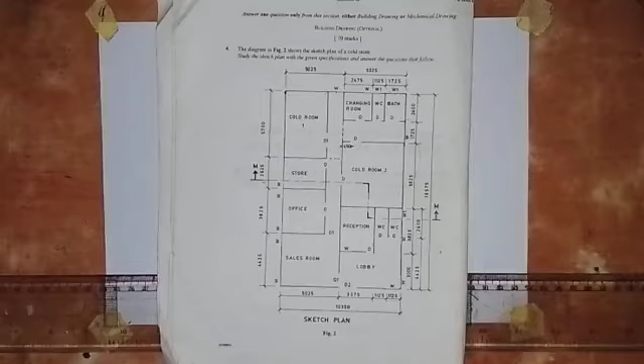Welcome back to my channel. Here we are going to be working on the construction of the sectional view of this building, as we have worked on the floor plan and we have also worked on the front elevation, and then we also worked on the right end elevation. So right now we'll be working on the construction of the sectional view, as we are told in the questions that we should draw to a scale of 1:50 the detailed section on plane MM.

Okay, so we need to look at the cutting plane, how it goes on the sketch plan. So this is the cutting plane, it goes in this direction like this, and it comes out here. The arrowheads, as we have, so it goes in this direction and this also goes in this direction. So we are cutting this part off and want to see what we have on the surface like this.

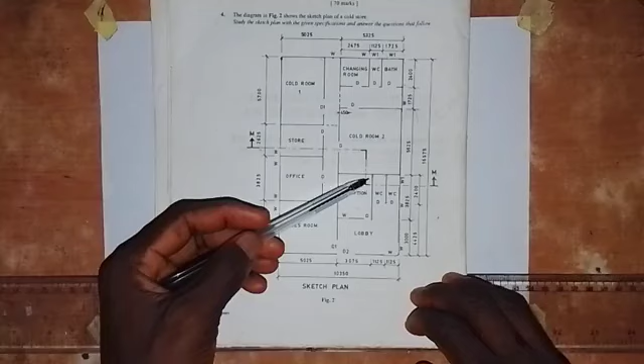Let's look at the walls that the cutting plane cut within the building. So it cut this wall, it cut this wall, it cut this wall here, and then it cut this wall, and this wall. So we have 6 walls: 1, 2, 3, 4, 5, 6. And then it also cut this wall, but for this one we'll tell you how we are going to show this in the drawing.

And then within this wall, it cut this window, it cut this door here, and then it cut this window here. So those are the components that we are going to put in the drawing. And then we are going to see this beam, probably we see this window, okay, and then we see this door. So those are things that we are going to put in this drawing.

All right, so the next thing that we are going to do now is to begin the drawing. We are going to start by drawing a horizontal line here. This horizontal line represents the ground line, so we are going to write GL here.

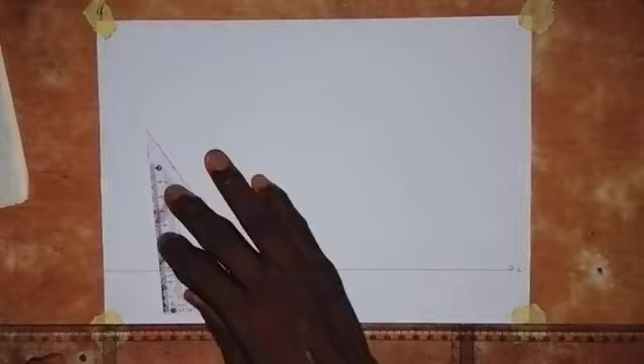So for the ground line, this is the first line that we are to draw. So we have this now. All right, so then we are going to start by positioning the external part of this wall here on this side. I'm going to draw a vertical line here, leaving a little space on this side, then I will draw a short vertical like this first.

Okay, so now let's look at the dimensions that we have to take. Let's take the total length from here to here first. So total length from here to here is 10,350. So 10,350 by 50 - what would that give us? I have to do that simple calculation.

10,350 - what is it going to give us if we divide it by 50, as we are given a scale of 1:50? So 10,350 by 50. That gives us 207. That is what it gives us. So we are going to take a measurement of 207 first.

So I'm using this ruler. From here, I have this to be 150, and then I have to add 57 to this to make it 207. So this is 57, we have this to be 57. All right, so then that is the total - that is going to be the last point that I put here, for this particular wall that we have here.

So I'm going to draw a vertical line at this point, just like I did for this. So this will be the external part of this wall on this side. All right, so then the next thing that we are going to do is to position other walls.

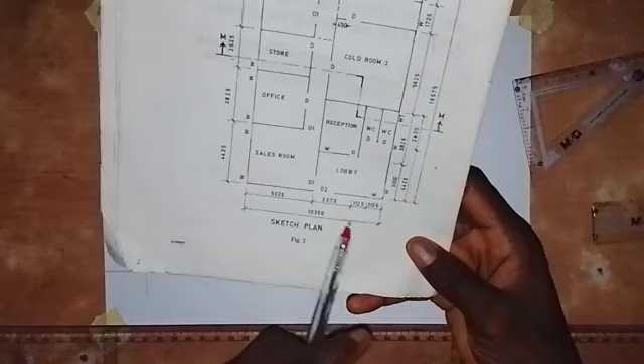So for other walls, let's start from here to here. So here we have the distance from here to here to be 1,125. Okay, if we divide 1,125 by 50, that gives us 22.5, approximately 23 millimeters. So I'll be taking it as 23 millimeters. I'll take a measurement of 23 millimeters - so this is 23 millimeters here. So I have this point.

Then we have 2 of them. So we also have for this one, from here to here is also 1125. So I'll take another 23 from this point to this side. Okay, so we have this now.

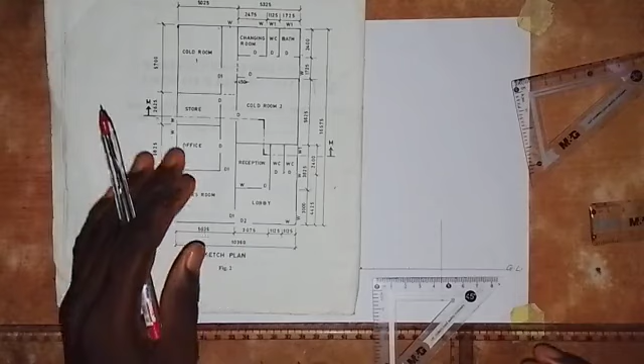All right, so then the next wall that we have here, we have to position, and then we have the distance from here to here to be 3075. So if I divide 3075 by 50, that gives me 61.5. So I'll take it as 61 millimeters.

So 61 millimeters, so we have this now. We position this wall that we have here at this point. Then we also need to position this particular wall, so I'll come to this end here. So for this particular wall, the total distance from here to this one is...

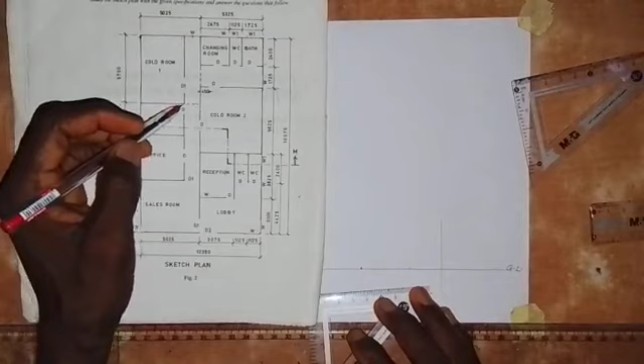5,025. But what I did in the floor plan, I used 1,500 for this distance from here to here. So if we divide that 1,500 by 50, that is going to be 30 millimeters. So I need to take a measurement of 30 millimeters from here. So this is 30 millimeters here.

So for this measurement that we have taken, they are all for the walls that we have within the building. We are going to draw a vertical line at this point here, take it down a bit, and then we also have a vertical line here. So we draw a vertical line here like this. Then coming to this point here, we also draw a vertical line, and coming here, we also draw a vertical line. So we have positioned all the walls, and these lines represent the external part of the walls. Now let's work on the thickness of the walls.

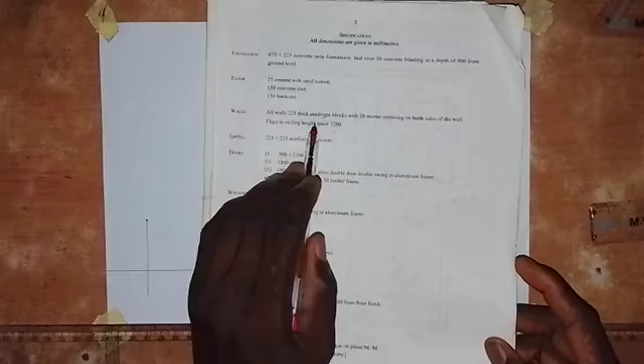So we are going to take a measurement of 5 millimeters from this. So this is an external wall, so we have to take that 5 millimeters inward. So this is 5 millimeters here. And then for this one, I will take this one to this side because we have more space on this side, so 5 millimeters to this side here. And then for this, we have more space on this side, so I will take it in here as 5 millimeters. So this is 5 millimeters here.

Then for this, I will also take it in here, so this is 5 millimeters. Then for this one, I will take it to this side, 5 millimeters here. So I have this. And then for this, I will take it inside because this is an external wall, so I have this as 5 millimeters.

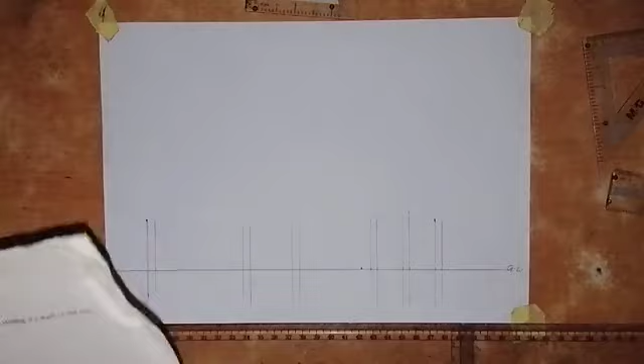So now we go for the construction of the foundation, footing and other things. Let's start. So this is the details of the foundation in the specification. Here we have that 675 by 225 concrete strip foundation laid over 50 concrete blinding at a depth of 900 from the ground level.

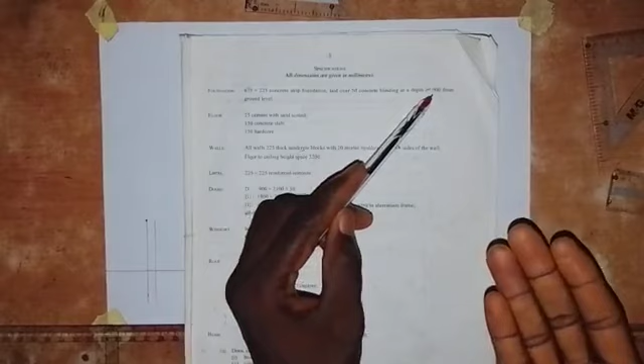So we start with the depth because the bottom of the blinding is at a distance of 900 from the ground level, so we started with the ground level. This 900 we are going to divide by 50, and that will give us 18 millimeters. So we take a measurement of 18 millimeters down the ground level, or ground line. So this is 18 millimeters. So we are going to draw a horizontal line, that's 18 millimeters. So from here we draw a horizontal line across. So it goes like this.

All right, so then the next thing that we are going to do is that we are told that the thickness of the blinding is 50.

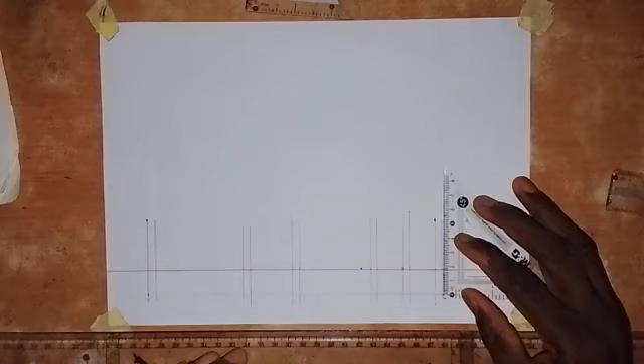The thickness is 50, so if we divide 50 by 50, that gives us 1 millimeter. But that 1 millimeter may not really show in our work, so I want us to make it something like 1.5 millimeters, so it's a little bit more feasible.

So to be a little bit feasible, we are going to draw a horizontal line. I've taken that measurement. Let me take it on this side so I'll use a ruler to join them together, and I'll also take it here on this side. Okay, so we have this.

So let me use something to join the points together. Okay, so if I join them, all right, so we have this now. This is going to represent the blinding.

So then the next thing we are going to do is work on the foundation footing itself. So we go this way.

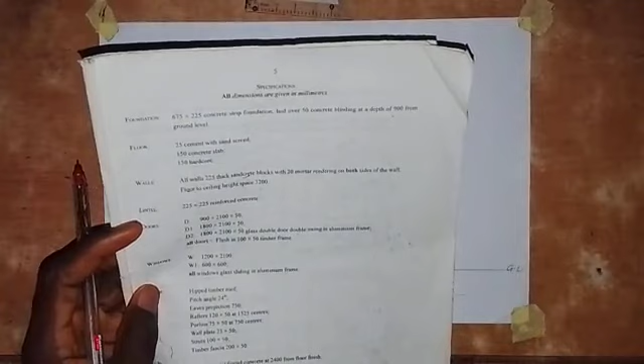So the width of the foundation footing is given as 225. If I divide 225 by 50, that's going to give us 4 point something - so 225 by 50, that is 4.5. So we take it as 5 millimeters.

So I will come up here and take a measurement of 5 millimeters above the second line that we drew for the blinding. This is 5 millimeters here. Then I will come to this end - I want us to use the ruler to join them. So this is 5 millimeters.

Let me just use the T-square to do the joining. So I can see the 2 points, I just need to draw a line like this to join them. So we have this now - that is for the width of the foundation footing.

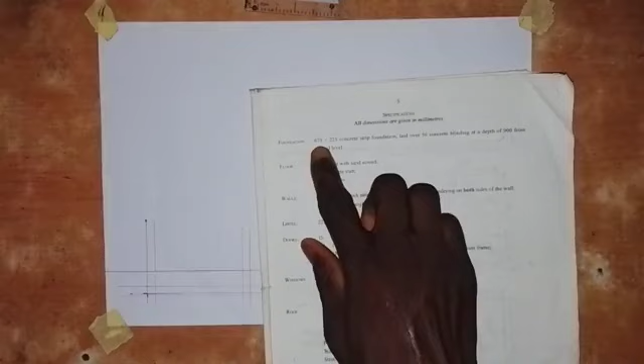The next thing we are going to do is work on the length of the foundation footing, which is 675. So 675 by 50 gives us 13.5. What I will do is make it 15 millimeters, because the thickness of the wall is 225, so I just make it 15.

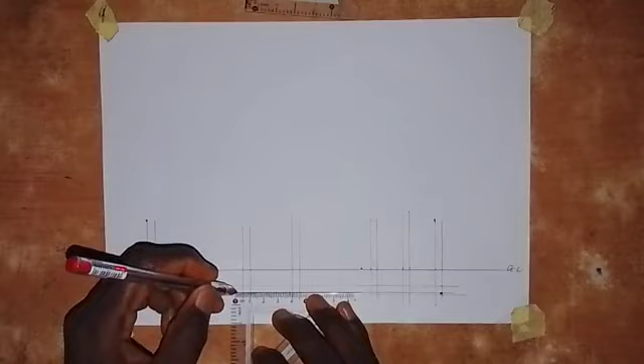So what I will do is come here and take a measurement of 5 millimeters to the left side, and 5 millimeters to the right side here. Then here also I will do the same thing, 5 millimeters to the left side. So I'm taking 5 millimeters to the left side and 5 to the right side here.

Then here also I'll do the same thing - 5 to the left side and 5 to the right side, and here also I will take 5 to the left side and 5 to the right side. So doing the same thing here: 5 millimeters to the left and 5 to the right side, so this is 5 millimeters and 5 millimeters. So we have this.

So the next thing I'm going to do now is make each of them a rectangle, by drawing this line from here to here, and then I will draw this line. Then here I will draw the line like this, and here I will draw this line. Then I'll do the same thing here. So we have this.

So the foundation footing and the blinding, that's what we are working on right now - they'll be in form of rectangles, as you can see me doing it here. So then I'm going to make this line a thick line like this, so that we can see it. And we also do the same thing by making this line a thick line here.

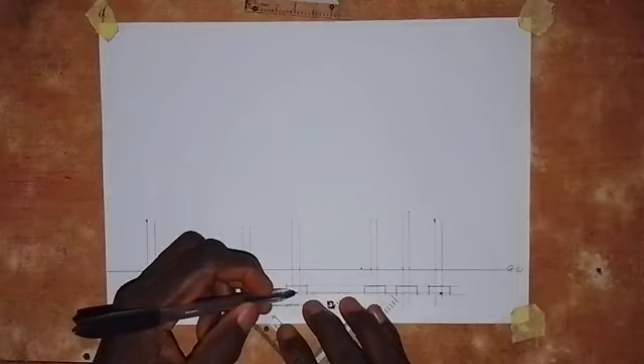Okay, so we have the foundation footing and the blinding. So what we are to do now, as we are told that the blinding is made of concrete, and the foundation footing is also made of concrete, we need to show that here.

So just draw something like this - put something like a triangle, and this will represent the gravel. We do the same thing for the blinding. I'm not going to do it for everything - I will come here also and do one, because you don't have to do it for everything. It's not compulsory to do it for everything, maybe just 2 or 3.

So this triangle I drew represents the gravel within the mixture. Let me do it for this one too. All right, so this is okay.

For the blinding, we just do the same thing as I did here. All right, so we are done with that.

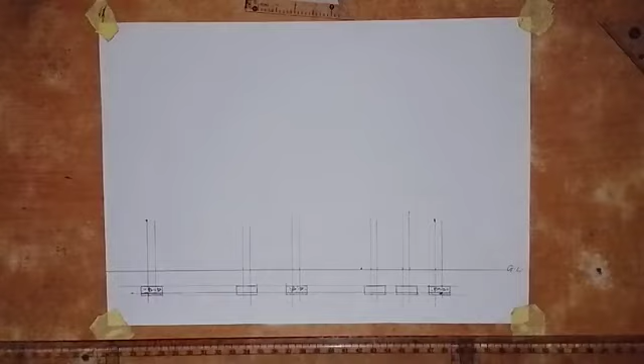The next thing we are going to do is the floor. So for the floor, we have the components: 25 cement with sand screed, then 150 concrete slab, and 150 hardcore. Each of these we are dividing by 50.

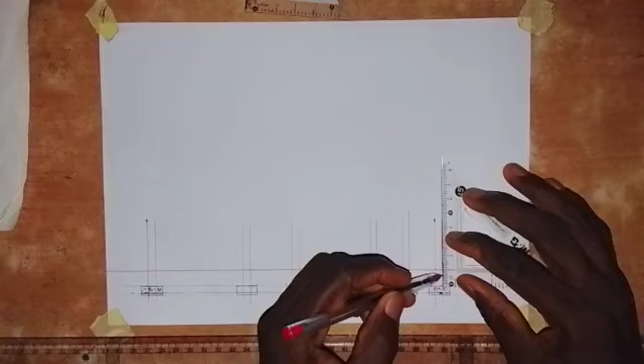We start with the hardcore. I'm going to assume the hardcore is placed under the ground level, since no condition is given in the question. So I'll take a measurement of 3 millimeters down from the ground level.

The hardcore will not pass through the walls, so we need to take note of that. We are going to draw a line that will not pass through any of the walls. This is how we are going to draw it.

Just watch how I do it. Draw a horizontal line from here to here, and here also draw a horizontal line from here to here. Then here, and here, and here, we draw horizontal lines. Let's extend it out a bit here too. So we have this.

This is the thickness of the hardcore, so I'm going to show the symbol for hardcore here. This is how we show the symbol for hardcore. It's very simple, just do it like this. This is enough, you don't have to do it for everything. Let me come to this end and do it here too. All right, so that is the hardcore there.

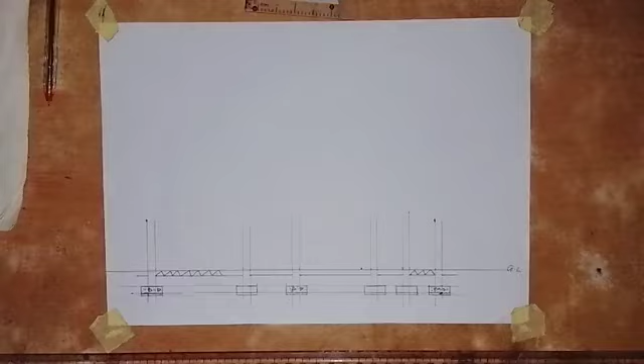Next is the concrete slab. We are told the thickness is 150, so we place it above the hardcore. We take a measurement of 3 millimeters from the ground level up. So here we have this to be 3 millimeters.

I'll also come and take 3 millimeters here. Now I'm going to draw a horizontal line. For the concrete slab, it will pass through all the walls because the walls are built over the concrete slab. So just draw a horizontal line like this from here to here. I can also make this line a thick line.

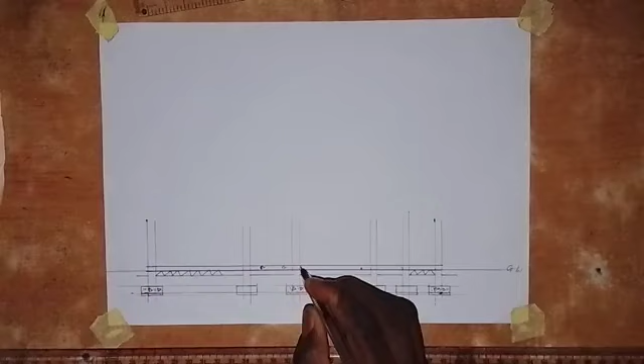Let's show the symbol for the concrete slab here so you can see it. Just draw something like this, just as we did for the foundation footing and the blinding, within this space. Let me put one more here. I'm not going to do it for everything, so then we move on.

So we have this now for the concrete slab. Now for the screed, its thickness is 25. If we divide 25 by 50, that gives 0.5, which is not even feasible, so I'm going to take it as something like 1.5 millimeters. The screed will not pass through the wall.

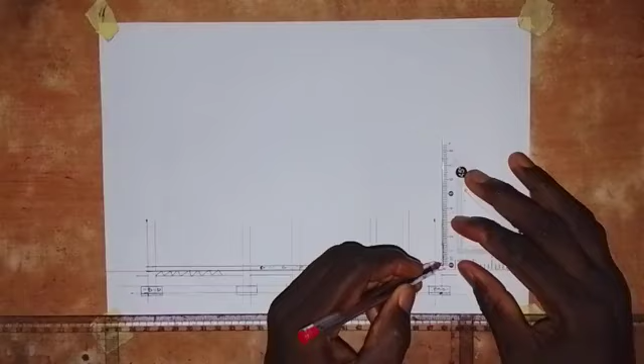So we take that measurement there, and also here, and join them together. It should not pass through the wall, as I said. So we draw a horizontal line from here to here, then here also, and here too, then we put dot dot dot in this space.

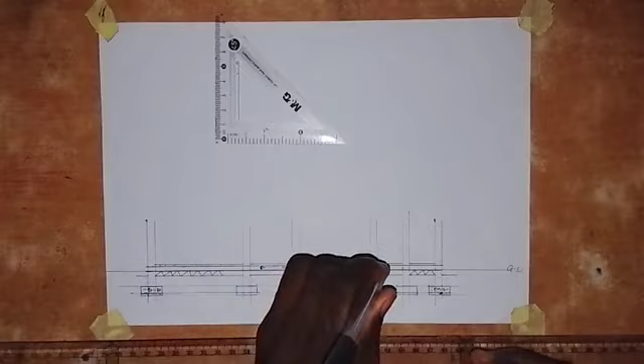I don't have to do it for everything. This represents the sand within the component. I'll just do it here a bit. You may not see it clearly, but I can see it here.

So let's put one outside here, and then let's put one here. All right, so we have this now. So that is the head. So we are done with the floor and the foundation.

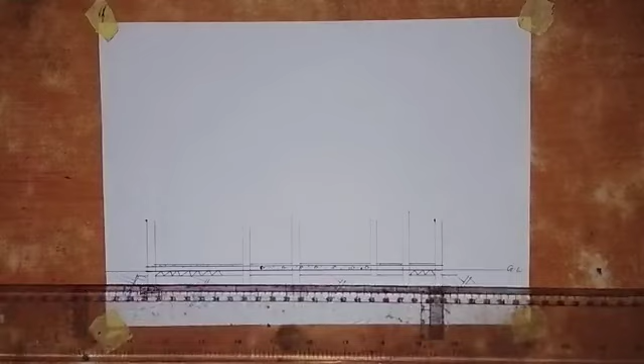So now the next thing that we are going to do is to go for the roof. So let's go and work on the roof. Then later we'll come back and work on the inner part of the building.

But I want us to extend this line up. So then I will also come here and also extend this line up.

Now, so we need to look at the floor to ceiling height. So floor to ceiling height is given to us as 3,200. So if I divide 3,200 by 50, I think that'll give me 64. So we have 64 millimeters.

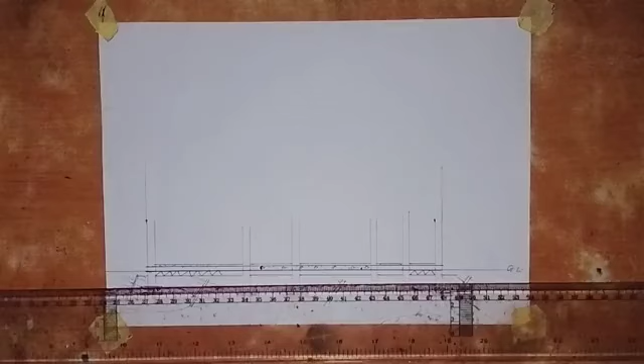So from the floor level, from the surface of the floor that we have here, that is where we put the screed. So we take a measurement of 64 millimeters up. So here we are 64 millimeters here, this is 64 millimeters. I will also come to this side.

So I extend this line up and take a measurement of 64. I want that line to be straight. So this is 64 millimeters. So I'm going to join this point together.

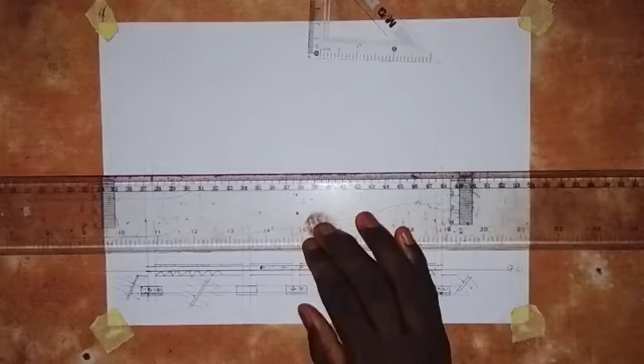So I'll draw a horizontal line here. Okay, so here we draw a horizontal line, so like this. So you draw it across like that.

Then the next thing that we are going to do is take a measurement of each projection. Each projection is 750, so 750 by 50 is 15 millimeters. So from this line here, take 15 millimeters out. This is 15 millimeters here. And then on this side also take 15 millimeters. So here is 15 millimeters here.

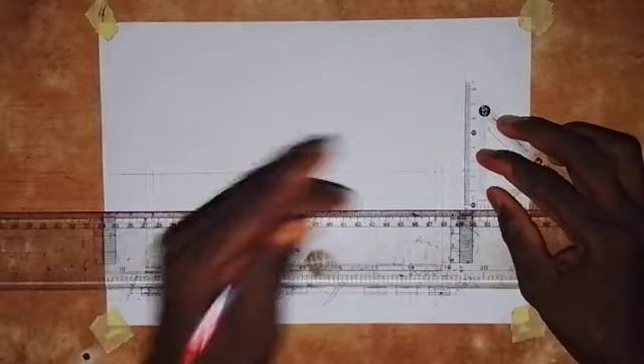So we have this. Okay, so we are going to draw a short vertical line up. So we have this. Then here also I will do the same thing by drawing a short vertical line up. So we have this now.

All right, so then let's place the wall plate over this wall. So let's take a measurement of 3 millimeters up. So this is 3 millimeters here. So here we have 3 millimeters.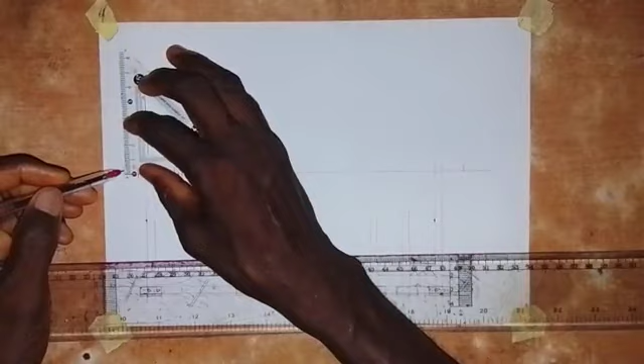So I'll also do the same thing here, 3 millimeters. Okay, so I want the thickness of the wall plate to be 3 millimeters. So I'll just draw it here, a horizontal line from here to here.

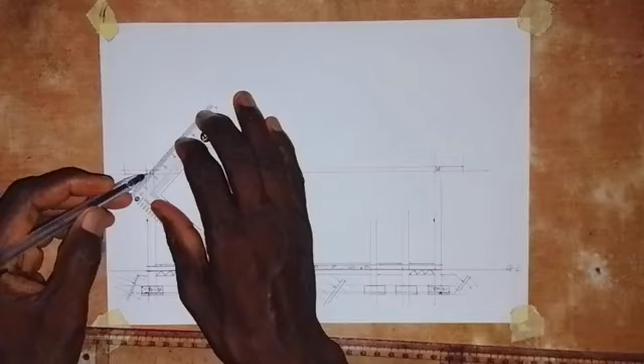So we draw a diagonal of this square like this, diagonals of this square. So we have this, that is representing the wall plate. So we also have this, and then we draw this also. So here we have the wall plate, just to show you there.

All right, the next thing that we are going to do is to place the tie beam. So for the tie beam also, I will take a measurement of 3 millimeters here. This is 3 millimeters. I'll take it from this end also 3 millimeters, so here we have this to be 3 millimeters.

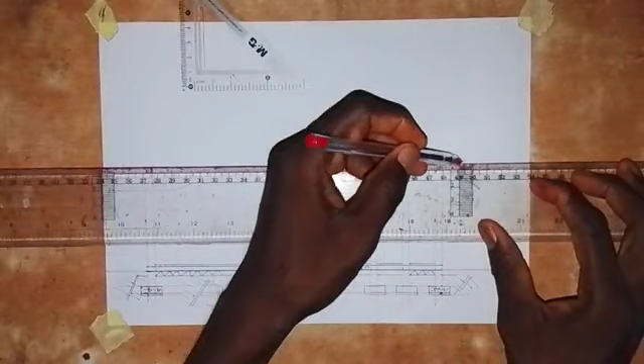So I'm going to join them together, drawing a horizontal line. So it goes this way. All right, so we have this now. So this is representing the tie beam.

So the next thing that we are going to do is to take the pitch angle. So the pitch angle is 24 degrees as given in the specifications. So this is it, 24 degree pitch angle, and this type of roof is a hipped roof.

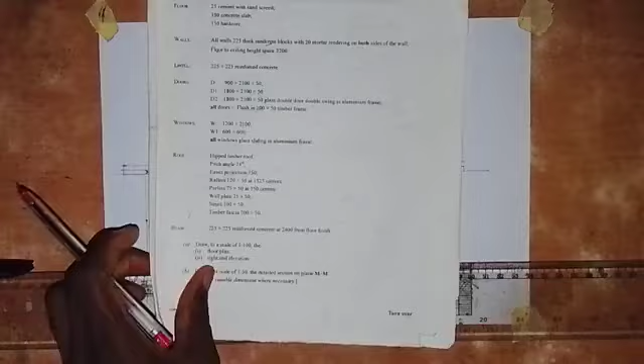Okay, so in this case, as the cutting plane goes like this, what we are going to see is going to be in triangular form. That's why we are taking the pitch angle, which is 24 degrees as I said. So we are going to place the protractor at this point, then we now take a measurement of 24 degrees.

Okay, so here we have this to be 20, so 24, this is 24 here. Just put a dot on the paper along that 24. Then I'll come here and do the same thing by setting the protractor like this, and take 24. This is 20 and this is 24 here. All right, so I can see where I put the dot.

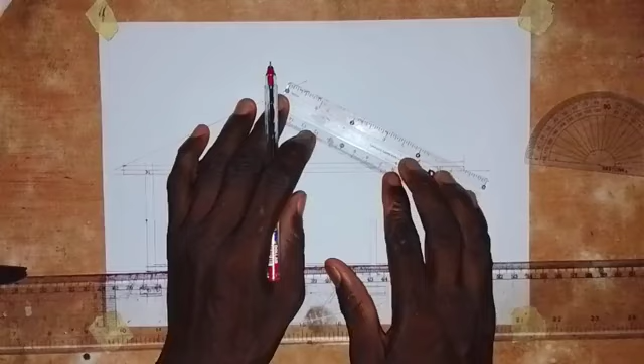I'm going to draw a line through this point. So to draw a line through this point, it goes like this. Then for this one I will set the ruler at this point here. You can see the point that I put on the paper, and I'm going to draw a line so they meet at this point. So we have this now.

All right, having done this, the next thing we are going to do is place the rafters. So I need to draw something like a right angle here. Okay, maybe I'll just turn it down. I need to draw a line that will be at a right angle to this line.

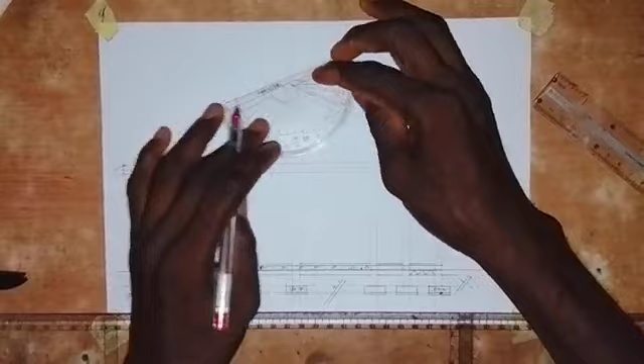So I'm setting the protractor on this line, I'll use this to get it out. Put a dot on 90 for this one, then come here and do the same thing by setting the protractor like this. So I have this point here, let me draw for this two, just a short line up through this point. So it goes like this, and for this one it's around here.

Okay, so it goes like this. All right, so I have that. I also need to do the same thing on this side for this line. So setting it at this point here, setting at this point. Okay, so I have put a dot here on the paper, and I set it here also.

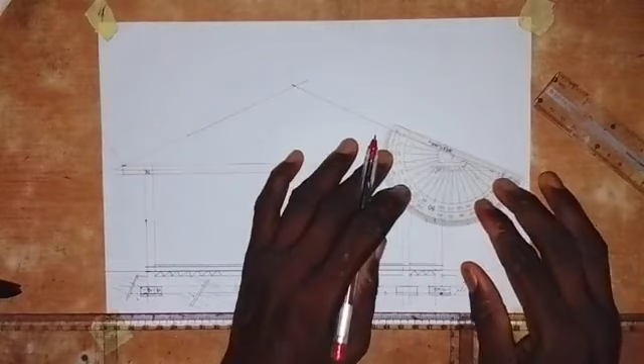Okay, putting a mark here. So let me draw for this. Okay, and then for this one, just to draw a short line from the point, so we have this. All right, so for the

rafters, so I'm going to do it this way. Let's bring it in a bit. So let this one come in a little bit, and this also comes in a bit. Okay, so this comes in a bit.

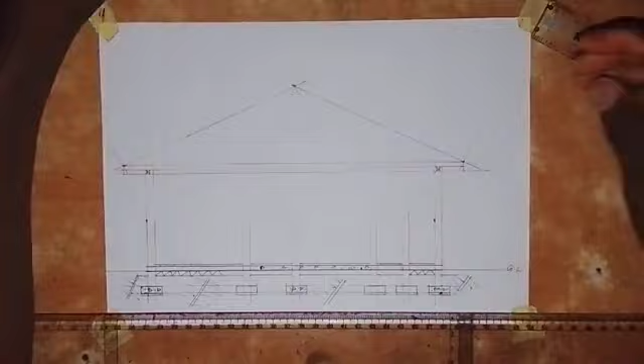Okay, so I'll be taking a measurement of 3 millimeters inward. So 3 millimeters inward on this. This is 3 millimeters here. Now come up here and take 3 millimeters inward along this line, so 3 millimeters in. Okay, so here I have this to be 3 millimeters.

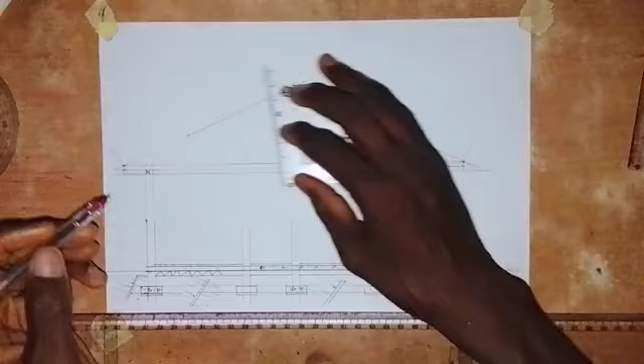Then coming here, I will also take 3 millimeters from this point inward, so this is 3 millimeters here. Then here I will also take 3 millimeters from this point in, so this is 3 millimeters here. All right, so I'm going to join those points together. I will join these two, joining them together like this.

All right, so then here also I'll do the same thing by joining these points together. So there are so many lines that we are going to produce, so I'll join this together like this. So this represents the rafters.

Okay, next we are going to put the purlin. So we are placing that over this. So we are going to put the purlin. The purlin, we also take 3 millimeters for the purlin, up from this line. So this is 3 millimeters here.

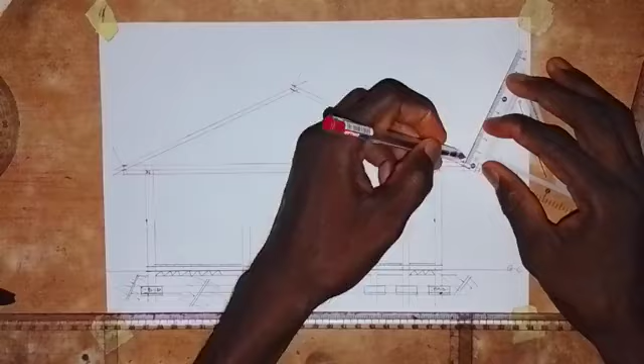Okay, and then I'll come up here and take 3 millimeters here. So this is 3 millimeters. So I can join this together. That is for the thickness of the purlin. Okay, so we draw this line.

Okay, let me do the same thing up here. So 3 millimeters. 3 millimeters in up. So we have 3 millimeters here.

Okay, then here also I will take 3 millimeters in from this point. So this is 3 millimeters. So I'm going to join these 2 points together. Okay, so we draw this line. All right, so we have that.

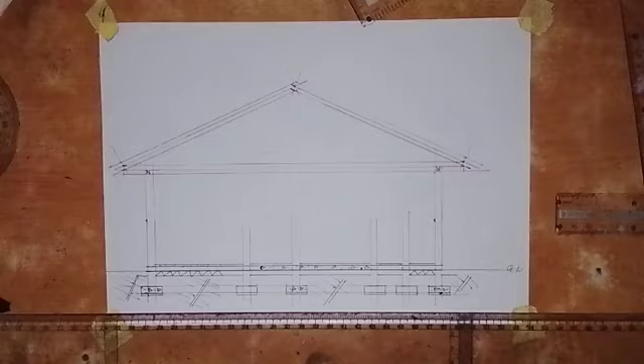So now for the purlin, we are going to set the purlin within this space. I'll do this space up here. So here we have what we have, that the purlins are 75 by 50 and at 750 centers. So let's work that out now. Okay, so I'm going to move away from this point.

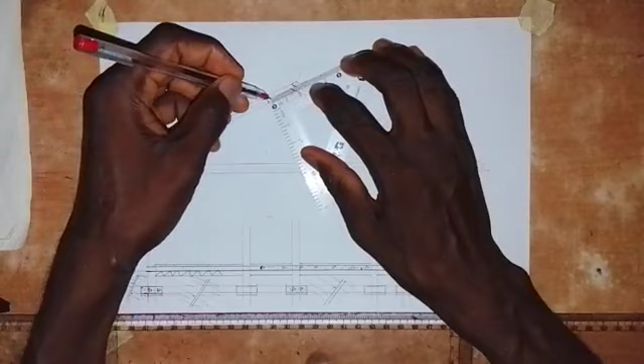So I move away from this middle center point by 15 millimeters. So take 15 millimeters here, then take a measurement of 3 millimeters. Then move away by 15 again, so this is 15 millimeters and take 3. Then by 15 again from this one, so 15 and take 3 millimeters.

Then here also move away by 15 millimeters, so 3 millimeters down. Then here also by 15, so 3 millimeters down. Then on this side also, by 15 millimeters down from here, 15 millimeters, 3 millimeters down. So we have this. Let me see, can we add one more? So 3 millimeters down, 15 millimeters down, and then 15 millimeters down, and then 3 millimeters down. Okay, we have this. So just do the same thing here on this side.

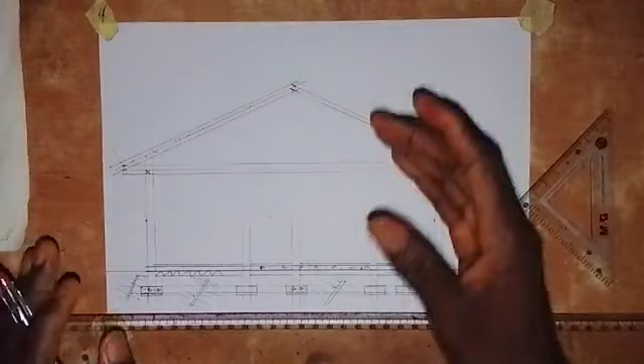I'm not going to do that because of time.

Okay, so let's bring out the purlin. So we are making it, showing it here like this. So this is the square end of the purlins. So just replicate the same thing on this other side as I said.

All right, so we have the purlins there. Please replicate the same thing on this side. So having done this, now we have to place the roofing material. That's the next thing that we are going to place here. So the roofing materials are laid on the purlins. Just repeat the same thing as I did here, that's very important.

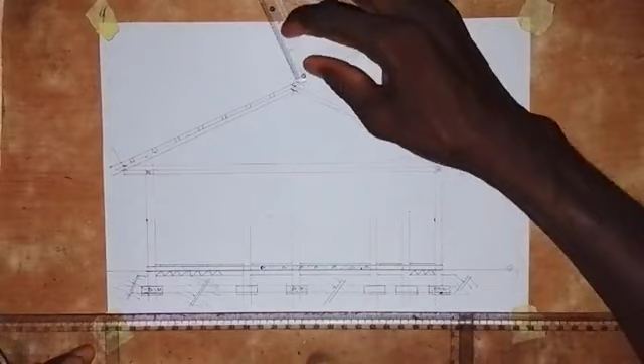So now let's put the roofing material. For the roofing material, let's make it something like 1.5 so that we can see it. So from this line, take 1.5 millimeters up. I'll also take from this line, 1.5 millimeters here. I'm going to join them together like this, the 2 points together for us to see it, and draw the line like this.

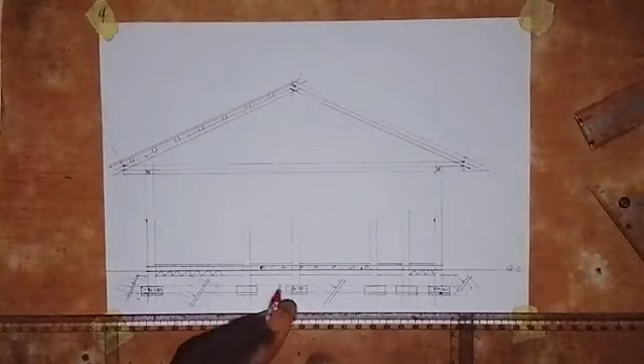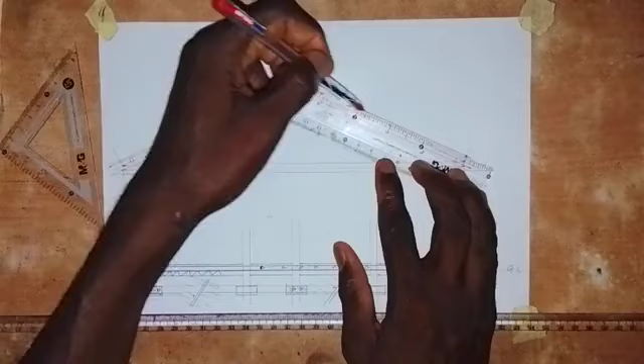Okay, so it will be a little bit. Then let's do the same thing on this side, let's show it here. So 1.5 up a bit, and I'll come here and take 1.5 up. All right, so I'm joining these 2 points together for the roofing material, it goes like this. So you can see it there, let it go a little bit out, beyond the ceiling. All right, so we have this now.

So the next thing that we are going to do is terminate the roofing material. Let's terminate it somewhere here, so just draw a short vertical line within that, and then I will also terminate it somewhere here. Okay, so we have this now, so what we just have here, this is it.

Okay, so we now need to show the fascia board. For the fascia board, I'll just take a measurement of 2 millimeters in, 2 millimeters in. So this is 2 millimeters. Then we draw a vertical line here, it goes like this. All right, so this is going to be the fascia board.

So here we have the fascia board there. I will also do the same thing here by taking a measurement of 2 millimeters in, then draw a vertical line here in this space. Okay, so here we have the fascia board, let me make this a bit thick. All right, so we have this now.

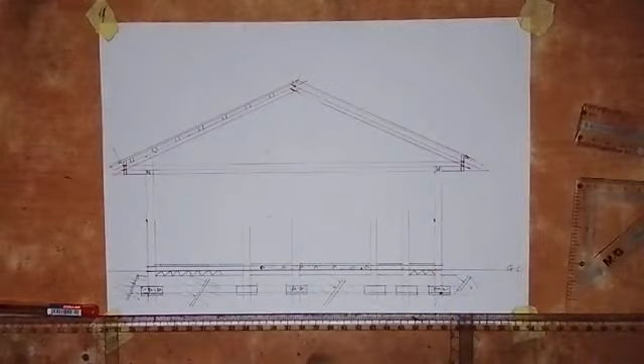So the next thing that we are going to do is take these walls up. I'm going to extend this vertical line, so this goes up to this level, touching this, and this also goes up like this. Okay, so this goes up, we also have this goes up, and for this also I will do the same thing.

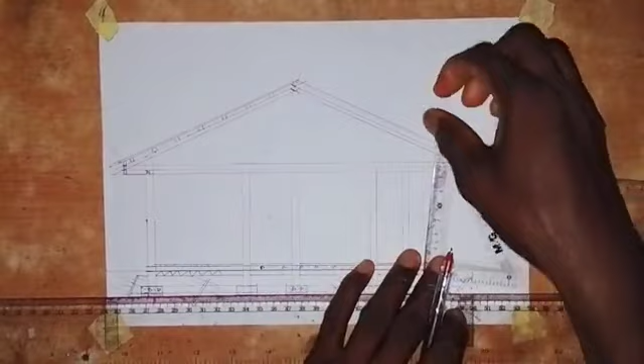Okay, so having done this, the next thing that we are going to do, we are supposed to put the ridge cap. I'll just quickly work that out here like this.

All right, so we have the ridge cap there. So that's the ridge cap up there. So just form something like that.

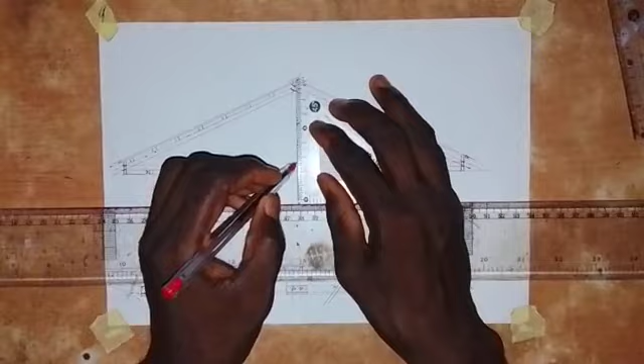So the next thing we are going to do here, we are told that we have struts. That means we are going to have a king post here in the middle. So I'll take the line, mark that middle point, and then take 5 millimeters to the left side here, and 5 millimeters to the right.

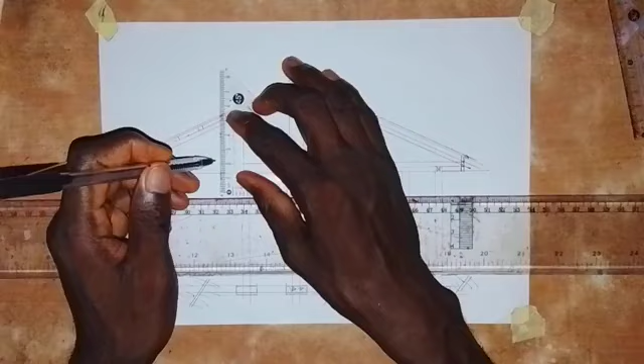So for this I'm going to draw vertical lines from these points. I will come here and draw a vertical line up from this point, so it goes like this. From this point also, that is 10 millimeters, I will draw a vertical line from here. So this makes it 10 millimeters thick.

So we have this, and here also I will do the same thing. I'll draw a vertical line here, and then draw a vertical line here, so that makes it 10 millimeters thick.

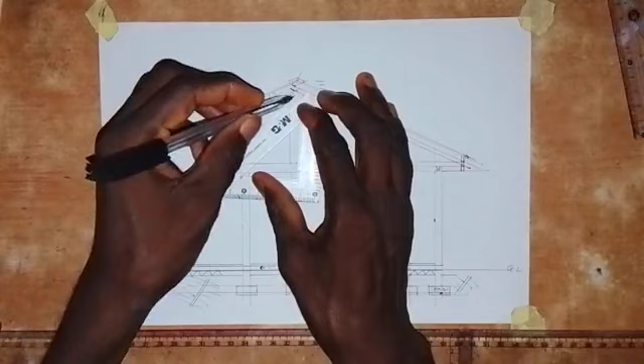For the strut, I'll just draw a line from here, draw a line from here and join it with this, and then I'll come here and draw a line that's parallel to this. So I'm just looking at it, and we draw a line like this.

Oh, this line that I drew is not supposed to be like this. Let me show you how it's supposed to go from here. I didn't pay attention to that, so it's supposed to go from here. Then draw one parallel to this from here. I should have drawn it this way.

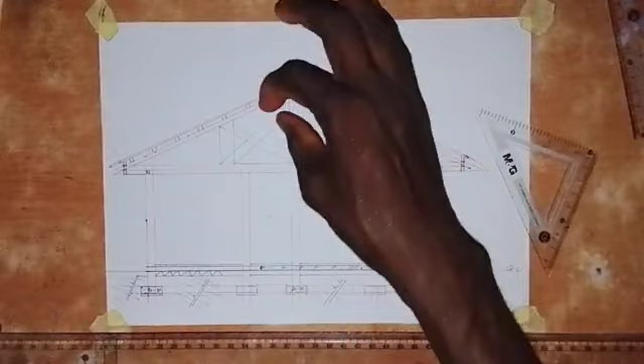This work will be a bit rough up here, but let me show it. So don't draw it like this, just draw it and then draw another one parallel to this. So this one is not okay, please don't put this there. Just draw the way I drew it here and here. So let's leave that.

So I used a pen. Supposing it's a pencil, I can erase it.

All right, so now let's work within here. Let's quickly work within here. So what do we have within this? Let's start with the door. There's a door that we have here in this wall, the third one here. If we move from this side, so we have a door here. So the height of this door is 2100.

So that's going to give us 42 millimeters. So we come here and take a measurement of 42 millimeters up. So here we have 42 millimeters. Because of the other windows that we have, the top of the door will determine the top of the window.

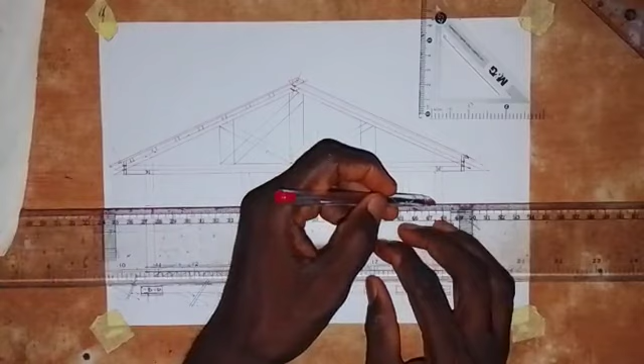So we are going to draw a line within this space, and we draw a line here because we have a window that is cut by the cutting plane within this wall and also within this wall. So we are going to make a lintel on each of these.

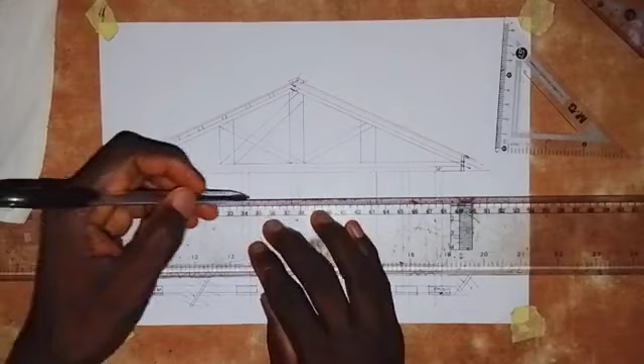There's a lintel, so over this, the lintel will be of the same thickness, that is 5. So we also come here and take 5 millimeters. This is 5 millimeters here, and then here also I will take 5 millimeters off. So we have to show the lintel, as we are going to do it here. So I'm going to draw a horizontal line within this space, for the thickness of the lintel.

All right, it's just made of concrete and metal. So just show it here like this. And then here we also do the same thing for the lintel, so we have this.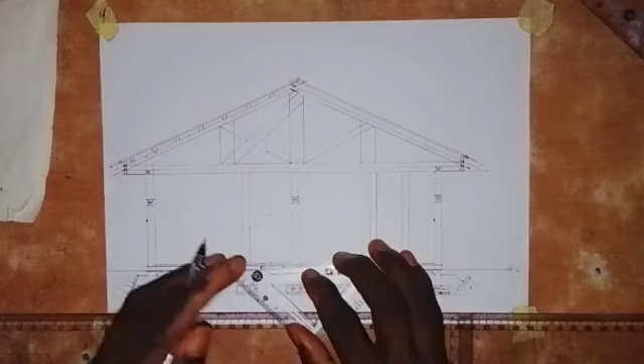All right, so then for this door that we have here, we are just going to draw 2 vertical lines within this space. So just set the ruler like this, and then draw this vertical line, and then draw this. So the door has been fixed there.

So what I'm going to do now is make this line a thick line, down like this. Then to show that this is a wall, just draw 2 lines like this within this space. All right, so then let's also do it down here, draw 2 lines like this.

All right, so then for this window that we have here, W is what, 2100, but it's not, this 2100 is not correct, so we make it 1200.

I think it's 1200 by 1200, and that will give us 24 if we divide by 50. So 24 if we divide it by 50, this is 24 millimeters here. So we have it to be 24 millimeters.

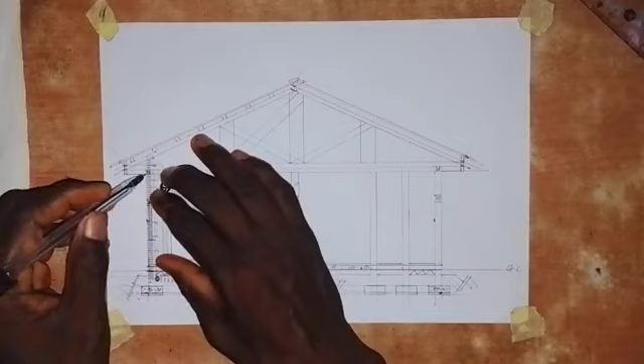So it is also cut by the cutting plane. We draw 2 vertical lines within this space like this. Here we have put the window that is cut within the wall. So then to show that this is a wall, we also draw 2 lines like this. Let's do it down here also, and then here we do the same thing. Okay, so we have this now.

So then we also have a window. This one is W1, which is 600. The height is 600, so 600 by 50, that's 12. So we are going to take a measurement of 12 millimeters down. It's a window in the toilet. So we take 12 millimeters down here, and then we draw this line.

Then we draw two vertical lines within this space like this to represent this window that is cut by the cutting plane. So we have it now. Let me make it more visible. All right, so we have this now.

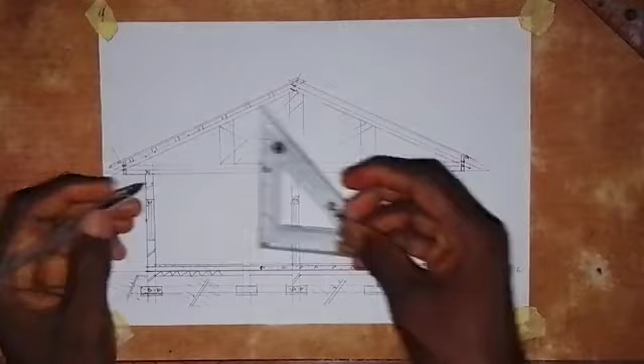Now other things that we are going to put here - we are going to put the ceiling joist. Let's just put the ceiling joist here. Just draw a line like this, and then let's put another one here. So we have the ceiling joist here like this. Okay, so that's it, so we represent that.

So next thing that we are going to put here - we are going to see this window, this door, this window and this door, and there is a beam within this space. There's a beam within this space, to be in line with this one. So it will be a rectangle, so we just have to draw a rectangle.

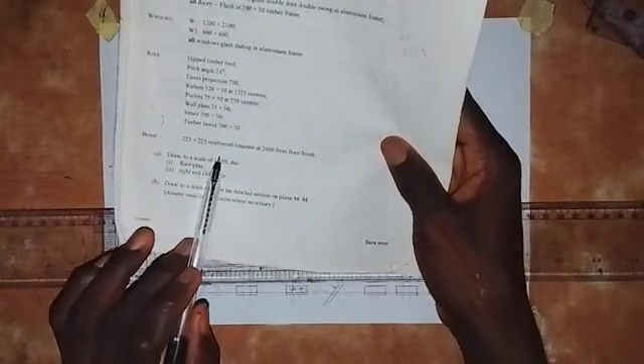Okay, I think there's a condition. So the beam, they said something about the beam. They said the beam is 225 by 225 reinforced concrete at 2,400 from the floor finish. So we have to put that condition into consideration.

2,400 by 50 is 48, so we are going to take it as 48 millimeters. So we have to consider that - 48 millimeters. So this is 48 millimeters here. Okay, 48 millimeters, so we are going to draw.

We draw a horizontal line from here to here, and then we also take 5 millimeters up - it goes up 5 millimeters, so this is 5 millimeters. So we are going to draw a horizontal line here. So this is how the beam will look, this is how it will look. It is within this space that we have it. So this is the beam now. Okay, that's what we have there.

All right, so now let's put this window. So this window that we have here, we're also going to see it. So it is W - we draw it, it will have the same height as this one that we have here. So we draw a horizontal line like this within this space, and then we also draw a horizontal line here like this.

So the width of this window is 1,200, that's also 24 millimeters. So we are going to take 24 millimeters within this space here - 24 millimeters, so from this point I will take 24. So this is 24 millimeters here. So I'm going to draw a vertical line here - we draw a vertical line like this, and then we also draw a vertical line like this.

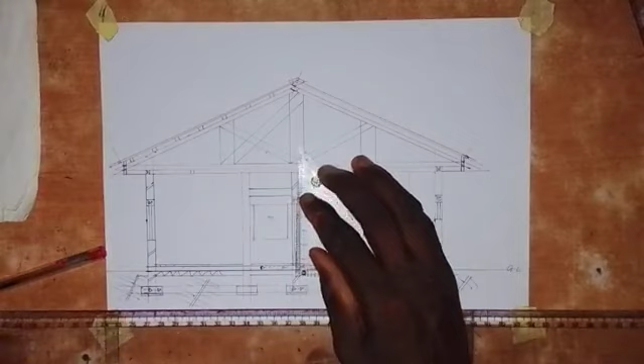So we are told that it's a what? It is a sliding window, so it's going to be in two pieces. So we have this, and then move away a bit and draw this line. Okay, so we are going to come down a bit, and then let's give it a frame here.

Okay, so we have glass here, so we are going to show that this is glass. So let's just draw lines like this. Okay, so that shows that this is glass.

All right, so then it is a sliding window, so we are going to put something like this, and then put an arrowhead here.

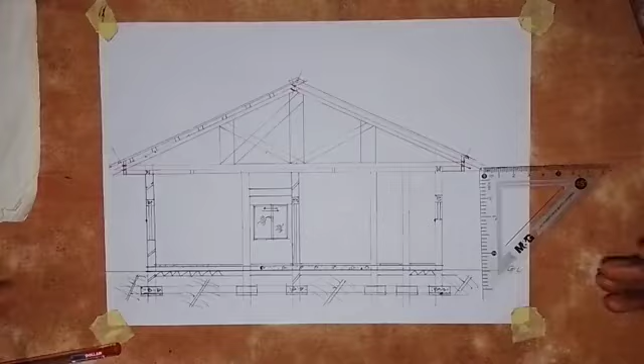Okay, so we also put an arrowhead here showing they are in two pieces and moving sideways. There's a door that we are going to see again. This particular door is within this space here, as we see it. So let's show that door.

So what we need is to transfer the top of the door here. So we transfer it here, and then we are going to draw it a bit close to this wall.

So they give us 450, the distance from here to here is 450, so that will be 9 millimeters. I have to take a measurement of 9 millimeters from this wall. So 9 millimeters here, I will start from here, drawing a vertical line down like this.

Alright, so the width of this door, as we have here, that is D, is 900, so that will be 18 millimeters. I have to take a measurement of 18 millimeters. So from here, this is 18 millimeters, I'll draw a vertical line like this. Okay, so we have this.

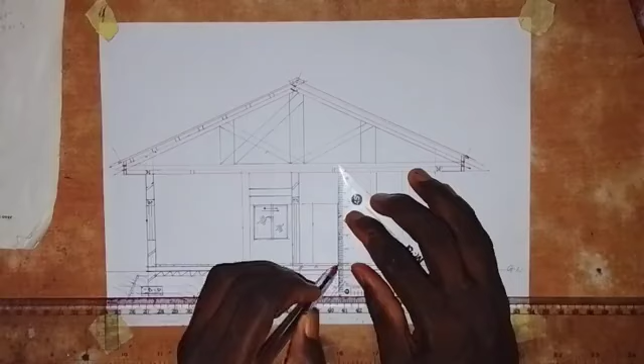So just give it a little frame. Alright, so we have this now.

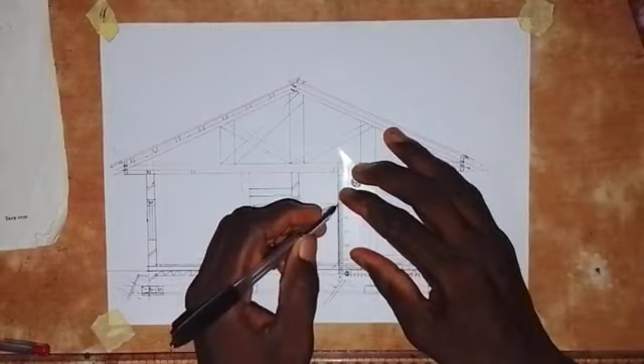So what type of door is this? As we have, okay, it's a flush door. It's a flush door, as given in the specifications, a flush door. So I'm going to leave it like this.

Alright, so I just put something here like this, it's a lock. So looking at what we have here, is there another thing we need to show within this? Okay, so nothing.

Okay, so there's a line. For this wall here, we're going to see a line. It is a little bit away from this wall, so I'll just come here and draw a vertical line. Just move away a bit and draw a vertical line here. So we are going to see it as a vertical line, that is how we are going to see it. Let's make this a little bit thick.

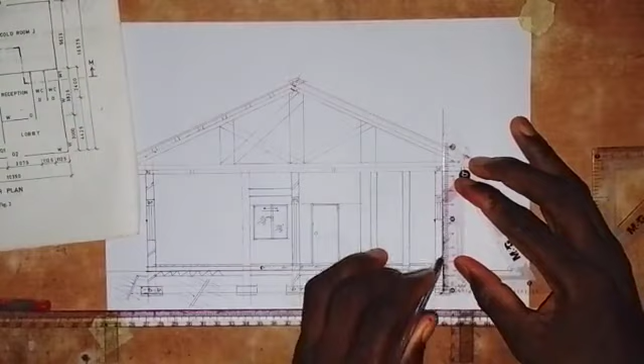Alright, so we also do the same thing here, and we also need to do the same thing for this. So to show that this is a wall, you have to just put two lines like this, and down here.

Alright, so we have this now. We also need to do the same thing for this wall, so do the same here. It's also a wall.

Alright, so that's it. Okay, so with what we have here, we still have this wall here. So show that it's a wall, put these lines.

Alright, so that's it. Okay, so with what we have done here, as I said, please don't draw the line like this, draw it the way I drew these two. So all we have to do now is write it here.

So write sectional view and write the scale here. Just make sure you do that, and after that you are done with this work.

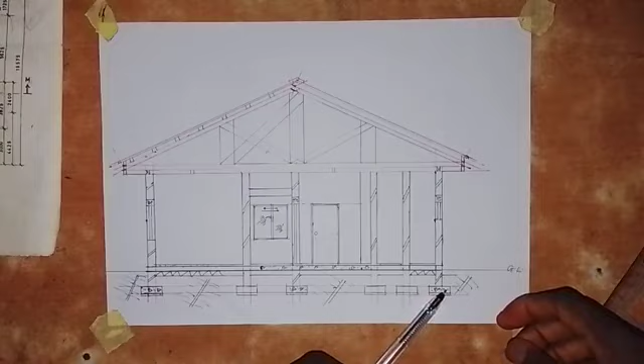Another thing is that if you can label some of the parts, what I mean is this. You can write what this is, the blinding. You can write blinding, just draw a line and write blinding. And for this one, write foundation footing, and then for this, write hardcore.

This is the concrete slab. This is the screed, you can write that. And also you can label this as roofing material or corrugated iron sheet.

Then as I said, don't forget to put the remaining purlins, so put them here in this space. Then just take one of them and label it as purlin. And then this is rafter.

This is king post, this is strut, and then here we have the tie beam. So we have the fascia board, okay.

Then you can also write wall plate. So this surface here is soffit, and the distance from here to here is eaves projection. Please put some labeling.

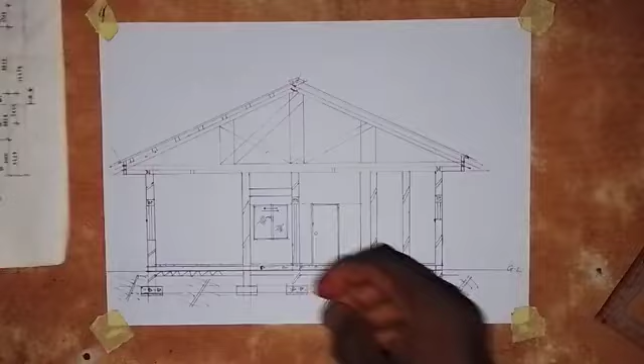And then here also, what is this space for? This particular space is for store, you can just write store here. Okay, then this cold room, we have it around here, so you can just write it there, to show some labeling. Very, very important, please do that.

Okay, so we have come to the end of the construction of the sectional view of this building. As simple as I've done it here, all you have to do is practice. Thank you, keep on practicing, and God bless you.